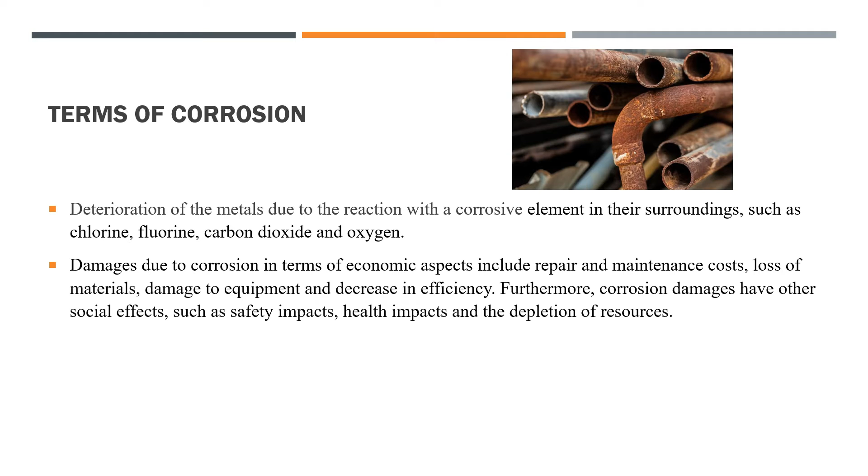Corrosion, in specific terms, is the deterioration of metals due to their reaction with a corrosive element in their surroundings, such as chlorine, fluorine, carbon dioxide, and oxygen. Damage due to corrosion in terms of economic aspects includes repair and maintenance costs, loss of materials, damage to equipment, and decrease in efficiency. Furthermore, corrosion damage has other social effects such as safety impacts, health impacts, and the depletion of resources.

Next, self-healing coatings. Self-healing materials are known as materials which are capable of autonomously restoring their properties in such a manner that they can function longer as compared to similar materials without self-healing abilities. Self-healing coatings are required for the total or partial repair of coated areas damaged by aging or unexpected aggressive events.

Concerning self-healing coating for corrosion protection, two main strategies have been pursued. The first one, mending of defects formed in the polymeric coating matrix via addition of polymerizable agents, and the second one, inhibition of corroding areas due to the presence of corrosion inhibitors.

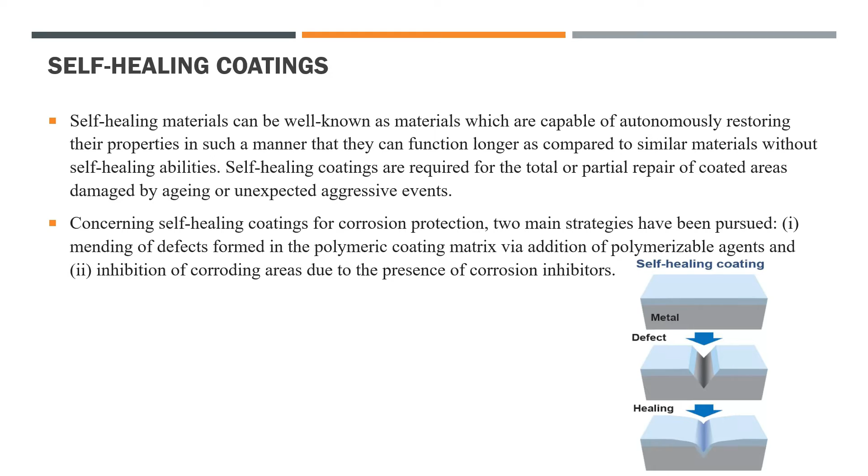Inspired by many natural materials such as lotus leaves, roses, and water striders, scientists have developed water-repellent superhydrophobic surfaces that have a wide range of applications in different fields, including self-cleaning, oil-water separation, drag reduction, corrosion resistance, water non-destructive transportation, and anti-icing. With massive research, the application of superhydrophobic surfaces has also been extended to the field of biopharmaceuticals. Superhydrophobic surfaces will have great research and industrial value with the potential for large-scale industrial production.

The general construction path of a superhydrophobic surface is to construct a rough structure on the surface of the substrate and then use a low surface energy substance to modify the rough surface. Therefore, the chemical composition and surface structure are important factors that affect the surface wettability. In recent decades, common methods for preparing microstructures on surfaces include chemical etching, mechanical processing, chemical vapor deposition, and electrophoretic deposition.

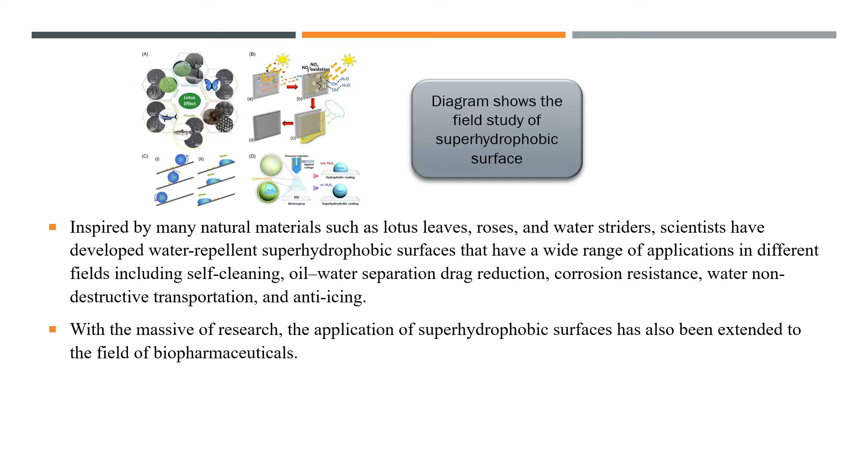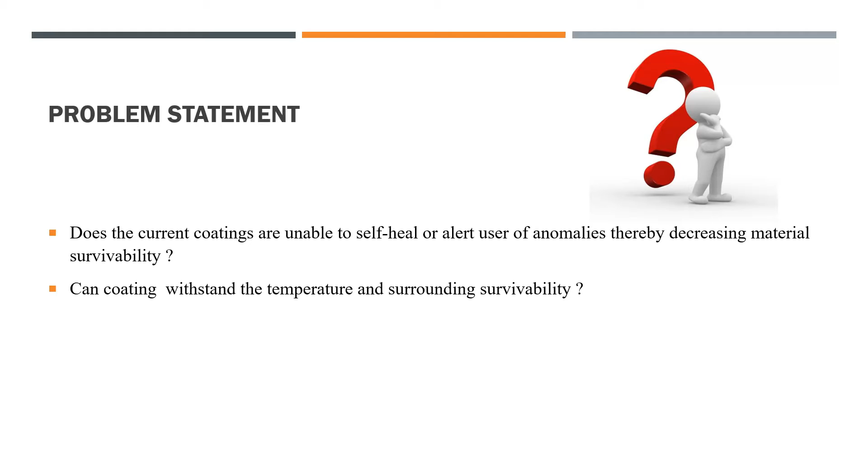And here comes the problem statement. Corrosion can be defined as an old problem that always occurs all over the world. Corrosion can affect metal from many aspects. As corrosion is being researched by researchers, the current application and removal of coatings would be labor-intensive and unsafe for individuals working with them. Thus, the current coatings are unable to self-heal or alert users of anomalies, thereby decreasing material survivability. And can coatings withstand the temperature and surroundings?

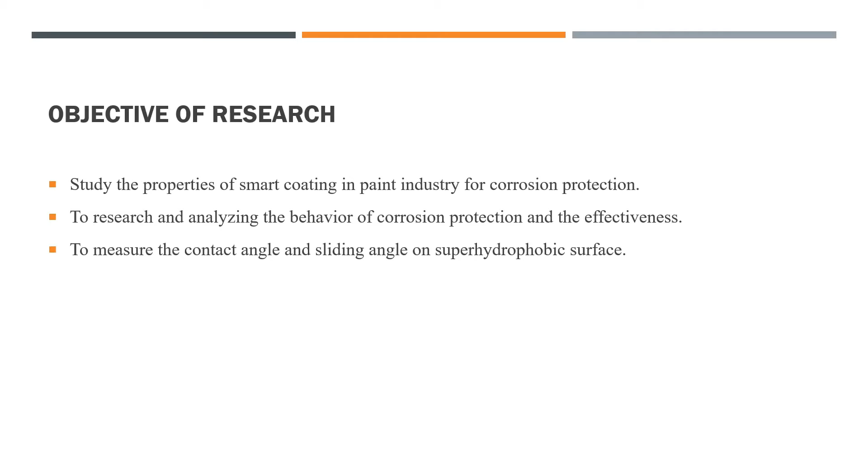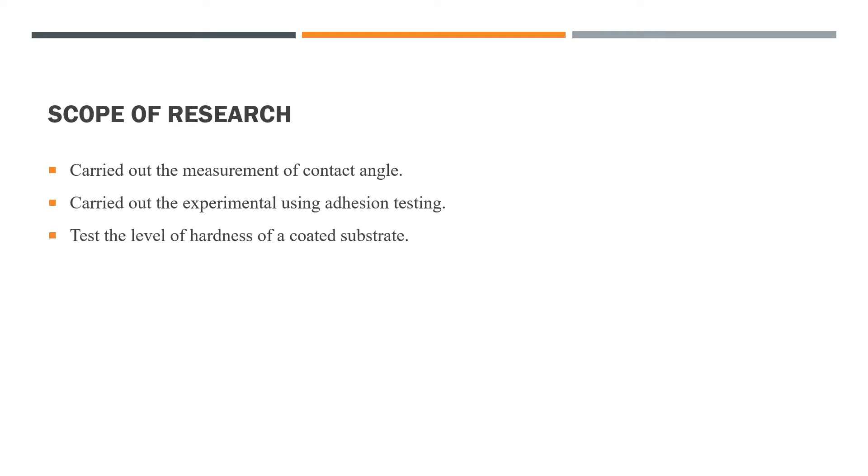The objective of this research is to study the properties of smart coating in the paint industry for corrosion protection, to research and analyze the behavior of corrosion protection and its effectiveness, and to measure the contact angle and sliding angle on a superhydrophobic surface. Basically, the scope of this research is to carry out the measurement of contact angle, carry out experiments using adhesion testing, and also test the level of hardness of a coated substrate.

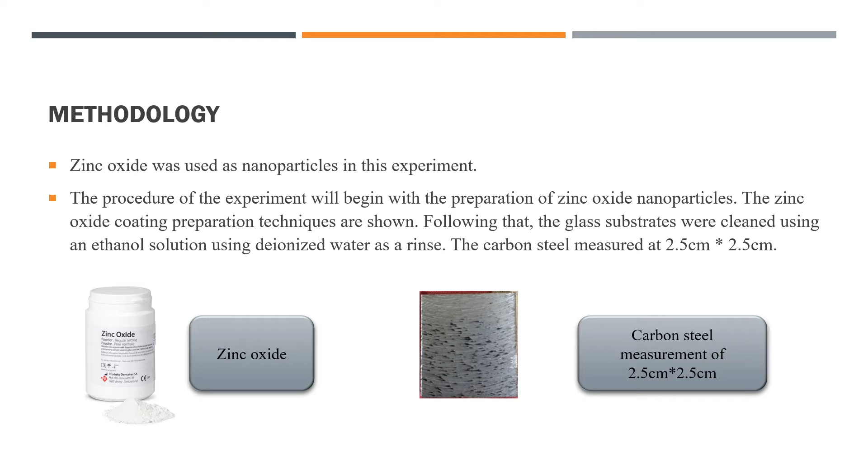As for the methodology, the preparation of materials and apparatus was carried out through a step-by-step procedure. In this study, zinc oxide was used as nanoparticles. So, the procedure of the experiment will begin with the preparation of zinc oxide nanoparticles. The zinc oxide coating preparation techniques will be shown. Following that, the glass substrates were cleaned using an ethanol solution, using deionized water as a rinse, and the carbon steel measured 2.5 cm times 2.5 cm.

For the fabrication of samples, the steps start with 2.4 grams of zinc oxide nanoparticles and 2.5% of stearic acid dispersed in 10 ml of 100% ethanol for 5 minutes with steady agitation at 180 rpm at 55 degrees Celsius, followed by ultrasonication at 500 watts, 20 kHz with a probe ultrasonicator.

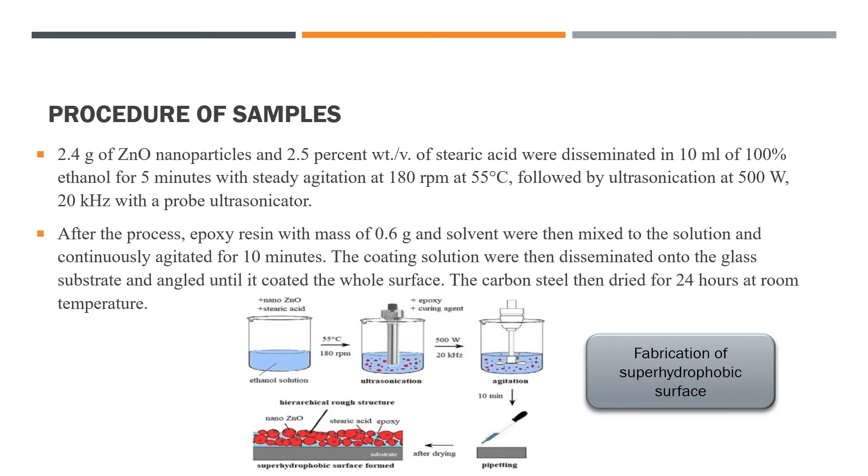After the process, resin mass of 0.6 gram and solvent were then mixed into the solution and continuously agitated for 10 minutes. The coating solution was then dispersed onto the glass substrates and angled until it coated the whole surface. The carbon steel was then dried for 24 hours at room temperature. Below is the diagram for the fabrication of the superhydrophobic surface.

In this research, adhesion testing also will be carried out. Adhesion testing is a test to determine whether the coating will adhere to the substrate during the term of its operational life. There are many types of adhesion testing such as pull-off test, tape test, scrape test, chisel test, bend test, heat quench test, and burnishing test. For this experiment, the tape test was carried out.

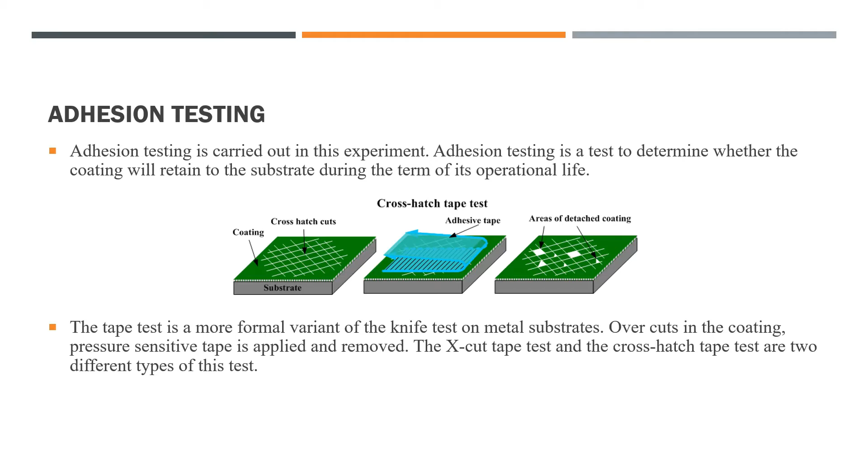The cross-hatch tape test is designed for use in the lab on coatings that are less than 5 mils thick. Instead of an X pattern, it uses a cross-hatch design. To ensure that the incisions are properly spaced and parallel, use a cutting guide or a dedicated cross-hatch cutter with various preset blades. The cut area is next inspected and assessed once the tape has been applied and removed.

At 3B, small flakes of coating are detached along edges and at intersections of cuts. The area affected is 5 to 15% of the lattice. At 2B level, the coating has flaked along the edges and on parts of the squares. The affected area is 15 to 35% of the lattice. At 1B level, the coating has flaked along the edges of cuts in large ribbons and entire squares have detached. The area affected is 35 to 65% of the lattice, and at level 0B, flaking and detachment in excess of 65%, which will result in failure.

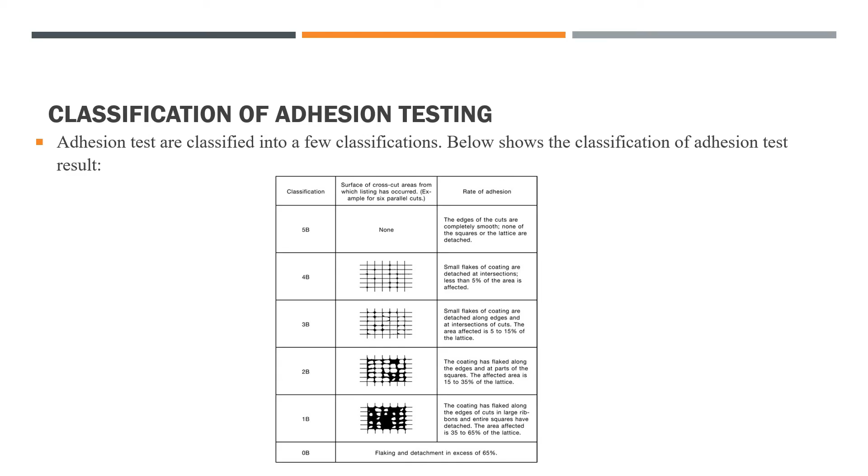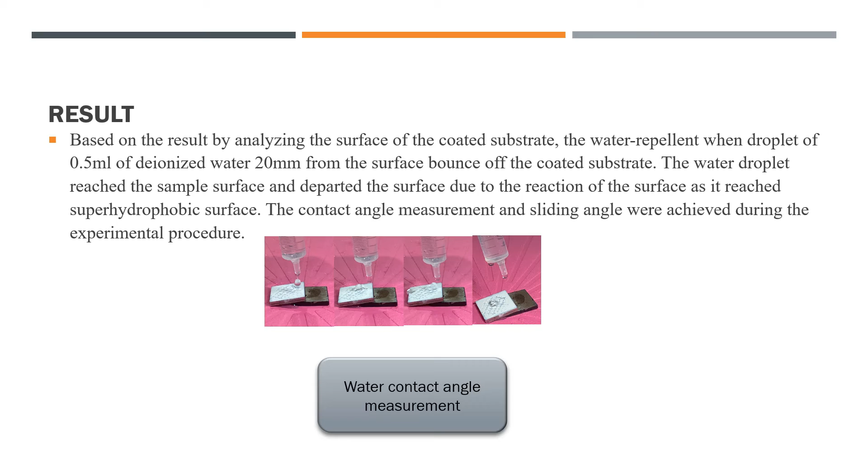Based on the result, by analyzing the surface of the coated substrate for water repellency, one droplet of 0.5 ml of deionized water from 20 mm above the surface bounced off the coated substrate. The water droplet reached the sample surface and departed the surface as it reached the superhydrophobic surface. The contact angle and sliding angle were measured during the experimental procedure. The water droplets bounce off on the superhydrophobic surface.

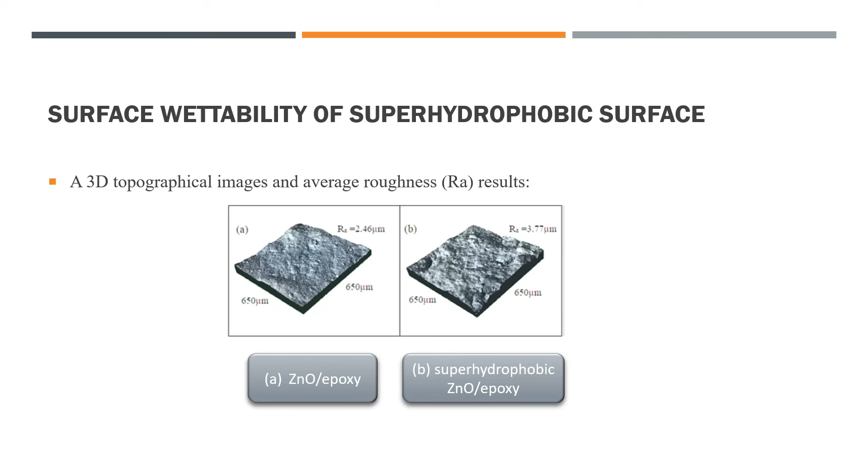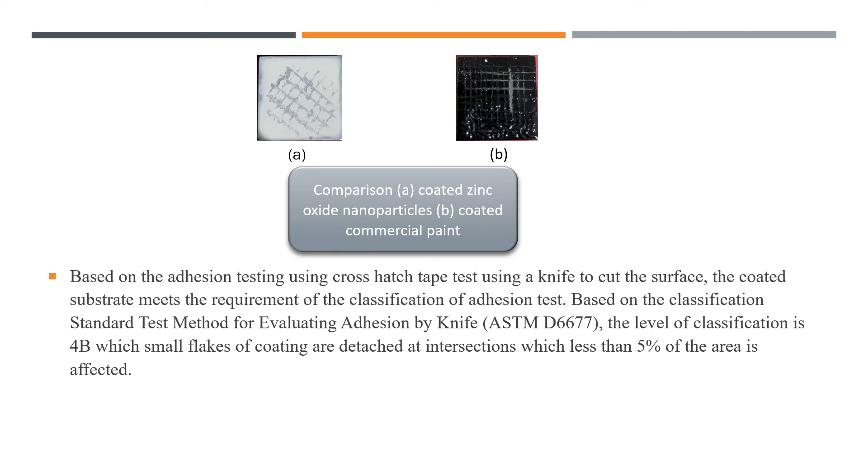The comparison of the coated zinc oxide nanoparticles and the coated commercial paint. Based on the adhesion testing using the cross-hatch tape test, using a knife to cut the surface, the coated substrate meets the requirement of the classification of adhesion test. Based on the standard test method for evaluating adhesion by knife, ASTM D6677, the level of classification is 4B, with small flakes of coating detached at intersections, where less than 5% of the area is affected.

For the conclusion and discussion, generally, a simple and effective technique depends on a one-step solution coating deposition procedure to build a lasting superhydrophobic surface using simple equipment and ambient temperature drying without the requirement for surface treatment. The solution primarily consists of zinc oxide nanoparticles, which play a significant role in the development of a multi-scale rough structure, while epoxy is added to improve coating adhesion and mechanical robustness, and stearic acid is added as a hydrophobic agent to reduce coating surface energy, with a water contact angle of 160.24 degrees and sliding angle of 3 degrees. The superhydrophobic surface demonstrated remarkable water repellency and self-cleaning properties.

The difference in hardness was an effect from the rigid substrate, which could influence the hardness measurement of thin films. Another possible reason for the softness of thick films was the greater amount of solvents retained in the thicker coatings. In general, as the solvent evaporation rate drops at the later stage of film formation, a small amount of solvents can eventually be trapped in the coating for months or years. Several other effects can also take place in thicker films, including the increase in internal stress, the porous structure, and cohesive failure. Thicker coatings have higher internal stress built up than thinner ones.